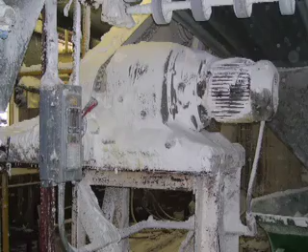No company wants to see its facility blown up and destroyed and its employees killed, but they just don't understand what the hazard is. They don't realize that they have a hazard here until that one day when the explosion occurs, and it's a terrible tragedy for them. And they look back and say, if we'd only known.

When Tammy Miser got a phone call late one evening in 2003, she worried it would be about her brother, Sean Boone, who worked at an automotive parts factory. We usually didn't answer the phone that late, but we knew when it kept ringing that there was something wrong, so we answered it. There had been an accident there before, so I knew. I knew if they were calling me, it was my brother.

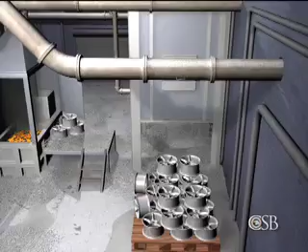Sean Boone was a mechanic at the Hayes Lemmerz plant in Huntington, Indiana. The company produced aluminum car wheels. The process of finishing the wheels left behind aluminum scraps, which were chopped into small pieces and sent to a furnace to be melted and reused.

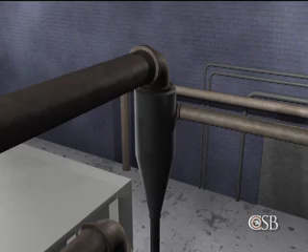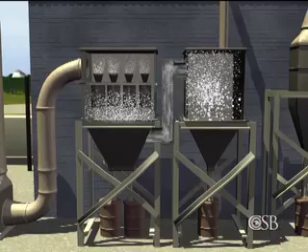Chopping, drying, and blowing the dry chips through the transfer piping created highly combustible aluminum dust, which flowed through ducting to a steel drop box outside the building, where large particles were trapped. The air then entered a dust collector, which removed finer aluminum particles.

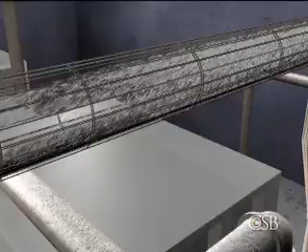Over time, aluminum dust accumulated inside ducts. In addition, there were leaks in the piping used to transfer aluminum chips, which caused dust to build up on surfaces throughout the furnace area. Aluminum dust landed on beams, ledges, and equipment. In some places, the dust was several inches deep.

On the night of October 29th, about 10 minutes after workers started the aluminum chip melting process, aluminum dust inside the dust collector was suddenly ignited, perhaps by a metal ember or impact spark, resulting in a large explosion.

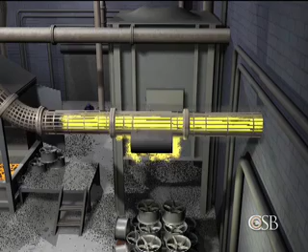The blast propagated back through the duct into the steel drop box, blowing it apart. The fireball and pressure wave continued back through the duct system into the building, gaining intensity as the accumulated aluminum dust ignited. The violent disturbance shook loose dust that had built up on external surfaces.

At about 8:30 p.m., plant mechanic Sean Boone was one of several workers in the area of the furnace. Without warning, a fireball erupted from the furnace, engulfing the area and igniting airborne dust in a second, larger explosion. The explosion blew a 50-foot wide hole through the roof of the building.

Co-workers found Sean Boone lying on the floor near the furnace, gravely injured. He was rushed to the hospital and put on life support.

And they told us that his internal organs were burnt, and they could take his arms, and they could take his legs, but he probably wouldn't make it, and it would just prolong it, so we went ahead and took him off.

Sean Boone was one of 14 dust explosion fatalities in 2003 alone. Launching a comprehensive investigation into the hazard, the CSB held two public meetings, convening panels of experts and listening to extensive public comment. First, combustible dust is a real serious problem in all of general industry.

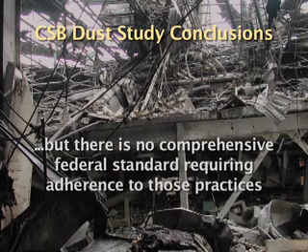The CSB report concluded that good engineering and safety practices to prevent dust explosions have existed for decades, but there is no comprehensive federal standard requiring adherence to those practices.

And many companies are not taking effective actions to control dust hazards. As a result, the board recommended increased regulation of dust hazards. The final report was approved at a public meeting in Washington in November 2006, and the report and recommendations are adopted.

We found in our study that the issue of combustible dust explosions is not focused on one particular industry. It happens right across all industries, including industries where you perhaps wouldn't expect there to be an explosion. Industries at risk include food production, metal processing, wood products, chemical manufacturing, rubber and plastics, and coal-fired power plants.

The CSB study provides many examples of the continuing toll from dust explosions. Coal dust exploded in 1999 at the Ford River Rouge plant near Dearborn, Michigan. 6 workers died and 36 were injured.

Resin dust exploded at the Jahn Foundry in Springfield, Massachusetts in 1999, killing 3 workers and injuring 9 others. Rubber dust exploded at Rouse Polymerics in Vicksburg, Mississippi in 2002, leaving 5 dead. A nylon fiber explosion destroyed Malden Mills in Methuen, Massachusetts in 1995.

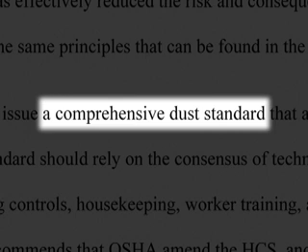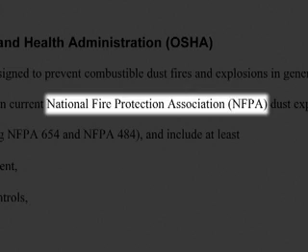The CSB report called on OSHA to establish a comprehensive regulatory standard designed to prevent dust explosions in general industry. The board said OSHA should base the new regulation on the current standards of the NFPA. These codes address hazard assessment, engineering controls, housekeeping, building design, explosion protection, operating procedures, and worker training.

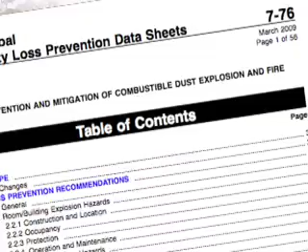The NFPA codes and standards have been in existence since the early 1920s, and there are 7 codes and standards that deal directly with dust. It's a tragedy to have even one loss of life because the technology is out there to prevent these dust explosions. In addition to the NFPA, the Center for Chemical Process Safety, as well as a leading insurance company, have developed recommended practices on controlling combustible dust.

The board also called for improved training of OSHA inspectors to recognize dust hazards. Interim CSB Executive William Wright explained the recommendation before the House Committee on Education and Labor in March 2008, citing 3 dust explosions the CSB had investigated in 2003.

State OSHA officers had inspected all 3 facilities prior to the accidents, but the dust hazards were never recognized or cited. Furthermore, the CSB determined that all 3 explosions could likely have been prevented if the facilities had implemented NFPA recommended practices. In addition, the board recommended that OSHA revise its hazard communication standard to ensure that material safety data sheets better communicate dust hazards to workers.

In response to the CSB's recommendations, in 2007, OSHA increased the enforcement of existing regulations through a new national emphasis program on combustible dust. Without a comprehensive standard for combustible dust, it's difficult for businesses to know which specific NFPA provisions or other requirements they may be subjected to.

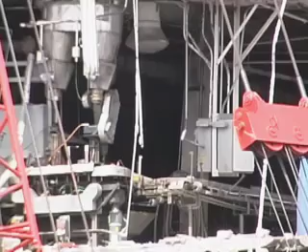The explosions tragically continue. The list includes the blast that crippled the Imperial Sugar Refinery outside Savannah, Georgia, in February 2008. Since 2005, about 70 additional dust explosions have been reported. And in fact, the Imperial accident last month is the deadliest industrial dust explosion in the United States since 1980.

CSB Chairman John Breslin: I toured the facility about 6 weeks after the explosion. The damage that was done there was catastrophic. As you walk around the facility, you think of the people who were working there that day, who were killed and severely injured. It was a difficult experience to walk around that facility. It was a very sobering experience.

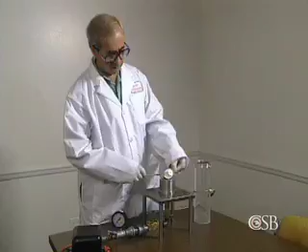What is so frustrating about dust explosions is that they're so preventable. And I believe that one of the reasons that dust explosions continue to occur may simply be a lack of understanding about the materials. Most solid organic materials will explode if the particles are small enough and they're dispersed in a sufficient concentration.

Some of the materials that could form combustible dust, and there are lots of them, could include coal, sawdust, food products like sugar and flour, pharmaceuticals, many chemicals, and even many metals. Like all fires, a dust fire requires fuel, oxygen, and an ignition source. A dust explosion requires two additional elements: dispersion and confinement.

The CSB commissioned laboratory tests using a sample of fine polyethylene dust found by investigators in the rubble of a North Carolina factory. Dust is dispersed into a flame, creating a fireball.

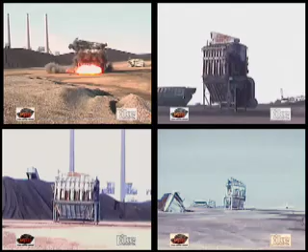When the dust is confined within a structure or a piece of equipment, a powerful explosion can occur and propagate, as this coal industry video demonstrates.

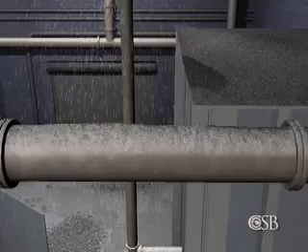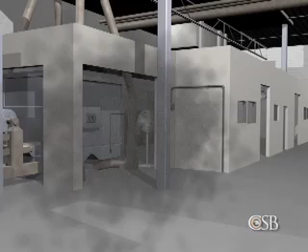According to the NFPA, a catastrophic explosion can occur from as little as 1/32 of an inch of accumulated dust, around the thickness of a dime, covering just 5% of a room's surface area.

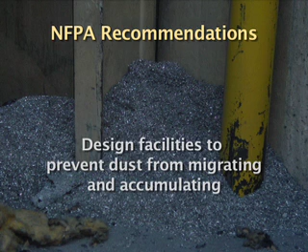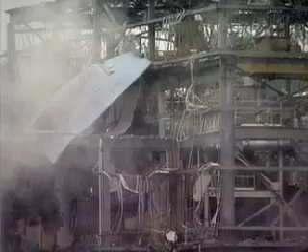The NFPA therefore recommends that companies control fugitive dust emissions, design facilities to prevent dust from migrating and accumulating, and perform rigorous housekeeping to remove any dust that does build up. The NFPA codes have been adopted either at the state level or in some cases at the local level, at the city level. But the problem is they're not enforced in any regular way.

A catastrophic dust explosion at the West Pharmaceutical plant in Kinston, North Carolina in 2003 reveals what can happen when companies do not properly assess the hazards from combustible powders and do not design their buildings and equipment appropriately.

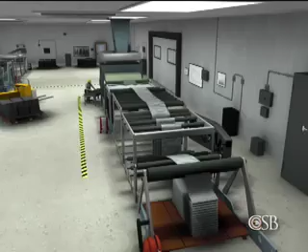West Pharmaceutical made small rubber medical products, such as syringe plungers and stoppers, at a large manufacturing facility with nearly 300 workers. In the process, large batches of rubber were compounded and rolled into long strips.

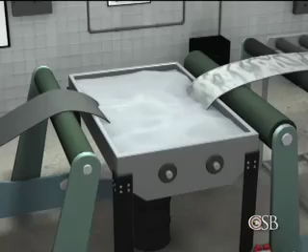To keep these strips from sticking together, they were dipped in a vat containing a whitish slurry of water and finely powdered polyethylene, a petroleum-based wax-like plastic. The coated rubber strips were then blown dry with fans and folded for later processing.

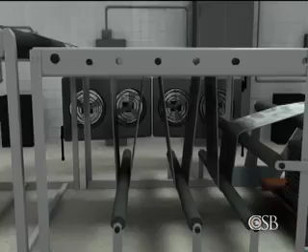As the rubber sheets dried, combustible polyethylene dust, which was not visible to workers but is colored white here for illustration, was blown into the air.

Over the years, the air conditioning system drew polyethylene dust into the hidden space above an acoustic tile ceiling that was suspended over the production area. There, the dust gradually built up to a thickness of up to 1/2 inch on ceiling tiles, beams, conduits, and light fixtures, just a few feet over the heads of unsuspecting workers.

January 29th began as a routine workday at the West plant. But at about 1:28 p.m., a small fire or explosion occurred somewhere near the production area.

It lofted the accumulated dust above the ceiling into a thick cloud, which then ignited in a much more violent secondary explosion.

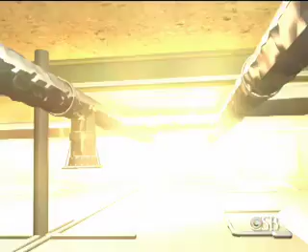Some employees described a sound like rolling thunder as the dust explosion spread throughout the space above the ceiling and ripped through the building. The accident at West Pharmaceutical Services took the lives of 6 employees and injured 38 others, including 2 firefighters.

The thing that set up the tragedy at West was the mere accumulation of hazardous dust above a ceiling. The NFPA code says that any openings where dust could accumulate must be sealed. The solution would have been to either seal it or to not have a suspended ceiling.

Another cause of the West accident was that workers were not informed of the dust explosion hazard arising from the polyethylene slurry, a fact that should have been included on the material safety data sheet.

At West Pharmaceutical, the dust wasn't well recognized as a hazard because it was actually in a slurry form. The actual processing of the slurry, the drying of it, created the dust, and the dust migrated above the suspended ceiling. Cleaning above the ceiling was overlooked in West's otherwise rigorous housekeeping program.

Cleanliness was a matter of pride for the West staff. Being in the pharmaceutical services industry, they kept the production area very, very clean.

Some of them knew that large amounts of dust had accumulated above the suspended ceiling. Had they been aware that it was an explosive material, they could have informed management of the accumulation, and perhaps the situation could have been rectified before the explosion.

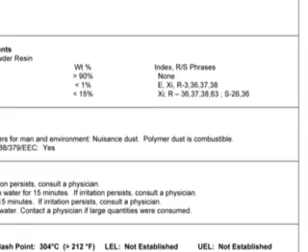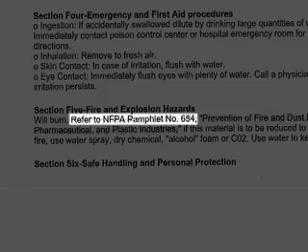The CSB found that the problem of inadequate MSDSs is widespread. Of 140 MSDSs for combustible powders, the CSB found that very few included adequate dust explosion warnings or referred readers to the appropriate NFPA standards. There needs to be better communication to workers on the issue of combustible dusts, through improved information on material safety data sheets.

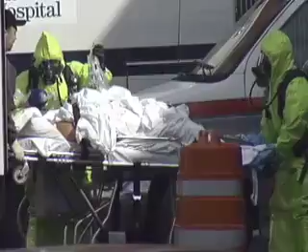Less than a month after the West Pharmaceutical accident, a fatal dust explosion crippled the CTA Acoustics plant in Corbin, Kentucky. The disaster at CTA, which claimed 7 lives, illustrates the critical importance of following NFPA recommended practices to control dust hazards.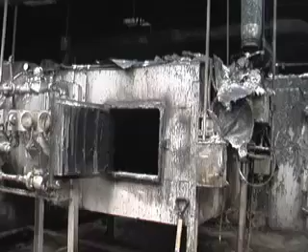The CTA facility, with more than 500 personnel, produced fiberglass acoustic insulation for automobiles. Covering 300,000 square feet, it had 5 production lines. At line 405, fiberglass was fed along a conveyor system and spread to create a web.

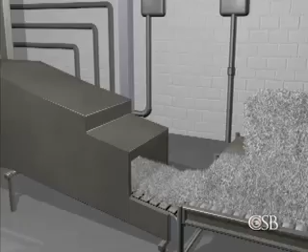Black phenolic resin powder was deposited onto the fiberglass. Hundreds of thousands of pounds of the combustible resin powder were used in the plant every month. Next, the mat former used air suction to spread the resin through the fiberglass.

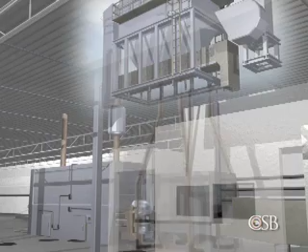Excess powder and fibers were drawn up into a dust collector and rapidly accumulated on long cloth bags. After the mat former, a nylon facing was rolled onto the fiberglass before it entered a gas-heated curing oven.

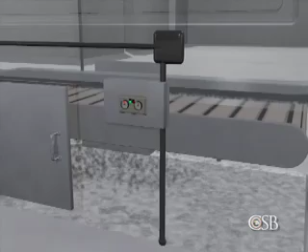Combustible resin accumulated in the oven, resulting in frequent small fires that were extinguished by workers. During each shift, the line was shut down for cleaning.

On the roof, employees routinely used compressed air to dislodge dust that had built up in the ductwork, dumping the material into a large open box on the production floor.

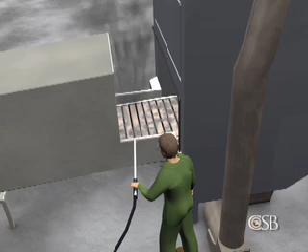On the production line, workers also used compressed air to blow dust off equipment. They swept the production floor with brooms. These cleaning activities created dust clouds so dense that large fans were used to blow the dust away from the operators. This increased the dispersion of dust in the plant.

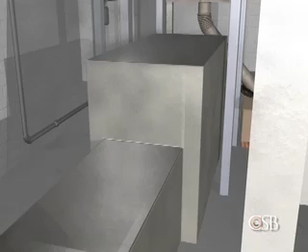The dust settled on horizontal surfaces throughout the entire production area. Over years of operation, dust built up on top of pipes, electrical conduits, and other hard-to-clean elevated surfaces such as roof trusses. A pile of resin dust more than a foot deep had built up on top of the blend room due to periodic cleaning of clogged equipment.

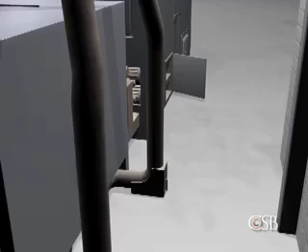On the morning of February 20th, 2003, production line 405 was shut down for routine cleaning. The oven was still on, with one of its doors left open to control the temperature because the oven thermostat had broken weeks earlier. CSB investigators later determined that most likely a small fire, unseen by workers, had started inside the oven, fueled by a buildup of combustible resin.

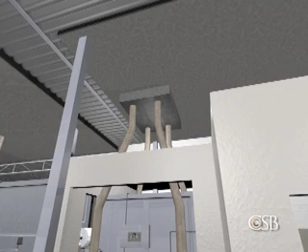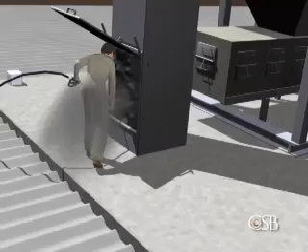During cleaning, workers had discovered that a transition duct leading from the mat former to the dust collector was clogged. They used a compressed air lance to dislodge the material back through cleanout doors into the production area. Together with other cleaning activities, this created a dense dust cloud around line 405.

A wall fan blew the cloud toward the open oven. The dust was ignited by the small fire inside. Flames erupted from the oven, igniting the larger dust cloud, which exploded. This was quickly followed by a second dust explosion at the other end of the production line.

4 employees nearby were injured. 1 later died from severe burns. The force of the 2 explosions shook the building and dispersed accumulated dust throughout the production area.

This airborne dust fueled a quickly moving fireball, spreading west along the roof trusses toward production line 403, which was also surrounded by dust. 4 workers in this area were fatally burned. The fireball continued past line 402, fatally injuring 2 more workers, and then to line 401, where a third explosion occurred nearly 300 feet from where the first blast was ignited.

3 workers in this area were severely burned. The 4 production lines were not adequately segregated, and this allowed the dust explosion to quickly travel from one production line to the next to the next. In this case, most of the employees who died were actually working a far distance from where the initial fire began.

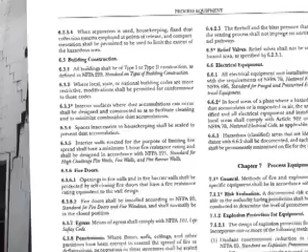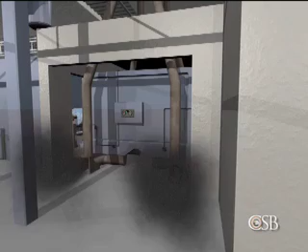NFPA recommends minimizing horizontal surfaces where dust can collect, but the CSB found that this was not done at CTA. There were many actions being completed that were prohibited in NFPA codes and standards. For instance, using compressed air can create more dust in the air, causing a larger fuel load for an explosion.

CTA personnel also used brooms and fans to clean the production lines, which dispersed dust throughout the building. NFPA standards emphasize the use of safe cleaning methods, such as vacuuming with specialized equipment.

In normal, routine, daily housekeeping, workers address the working and walking surfaces in their production areas. They address their equipment, the places that they can see. But when it comes to preventing dust explosions, much more is needed. You have to clean in the out-of-the-way places, up near the rafters.

You also don't want to over-rely on housekeeping, because if you have housekeeping round the clock and you're still seeing layers of dust, you might want to look at your system to see why that dust is being produced in the first place. The CSB also found the material safety data sheets for the phenolic resin powder used at CTA did not adequately warn of the dust explosion hazard.

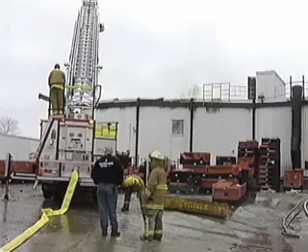Kentucky State Fire Inspectors had not visited the facility since its construction in 1972. Insurance companies had inspected the plant on multiple occasions, but never identified the dust hazard. Neither had state authorities. We found that Kentucky OSHA had, in fact, inspected this facility not long before the explosion, yet they had not uncovered the combustible dust hazard. We further learned that they had not received specific training to be able to detect this deadly hazard.

Following the CSB investigation, Kentucky officials established a new program to inspect facilities with dust hazards and developed an educational bulletin on dust, which was distributed to thousands of facilities.

There's been a big explosion at one company.

Why do these accidents keep occurring is the age-old question. The knowledge is out there to make sure that no deaths occur due to dust explosions.

I think the big problem with combustible dust is that we underestimate its hazards. We become complacent and we fail to take the necessary precautions. 'But it's not going to happen in my plant.' 'Because it never happened that way before. We've been operating for 40 years and never had a problem.' That kind of logic is one that can guarantee you to get into trouble.

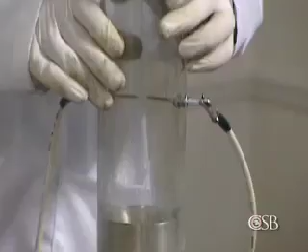Any material that they have in their process in a dust form should be tested to determine if it is a dust explosion potential or not.

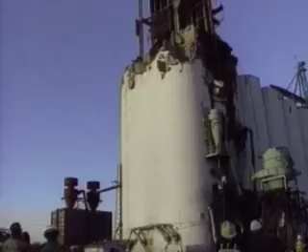In the 1970s and 80s, the U.S. experienced a series of grain dust explosions that killed many people. OSHA responded with new regulations in 1987 requiring preventive maintenance, worker training, and formal dust cleaning programs in grain handling facilities. A 2003 OSHA analysis concluded that the number of deaths from grain dust explosions had dropped dramatically.

OSHA has a specific standard for grain dust, and that's been a very successful standard, significantly reducing the number of accidents involving grain dust. I believe if there were a national OSHA requirement dealing with dust explosions, the incidents would be significantly decreased.

In April 2009, Secretary of Labor Hilda Solis announced plans for a comprehensive regulatory standard. 'Where workers are in danger, where mandatory regulations make sense, we will act and we will implement. And I'm announcing today that OSHA will begin the rulemaking on combustible dust.'

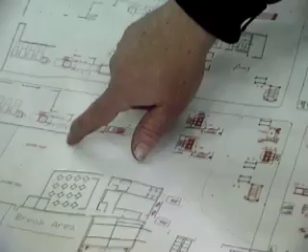What I feel that we need to do to prevent combustible dust explosions is threefold. We need education, we need industry to understand what the hazards are. We need regulation, a comprehensive combustible dust regulation, and we need enforcement of the regulation. If we do all three, we'll go a long way to preventing these terrible tragedies we're seeing with combustible dust explosions.

The only way to keep my brother from dying in vain would be to make changes. And if there's not a change made, well, then you know it's going to happen again. I hope that people who watch this video will take the lesson that they really need to do something to prevent combustible dust explosions. For more information on combustible dust, please visit csb.gov.